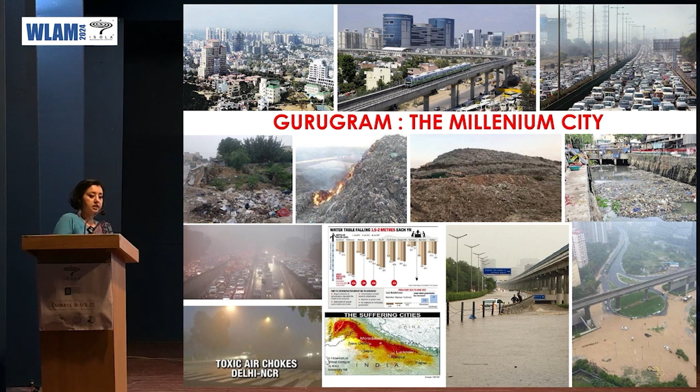The projects were typically for the government, and the land was owned by the government. Just a little bit about Gurgaon: it's called the Millennium City, but up until 2011 its population had tripled in just 10 years. Subsequently, we hear more about it in terms of Gurujam - the city gets flooded, waste is a humongous problem, it's polluted, it's flooded, and the government asks you to work from home at the drop of a hat if it rains.

The city of Gurgaon is located south of Delhi. The Aravali Hills to the southeast have all the watershed flowing from the Aravali Hills to what was the Ghata Lake, which was 340 hectares, and is now just 1 acre. The entire storm drain went through Badshahpur, all the way up to Najafgarh and then following on to Yamuna. It's a fairly flat city other than the Aravali Hills.

The section that is highlighted is actually half of that. Because of the flooding over many years, most of the natural waterways and channels have been impacted and encroached upon. This is the start of where our site was - it was actually the Badshahpur Jheel, which was a very significant water body. It no longer exists. This is in 2018.

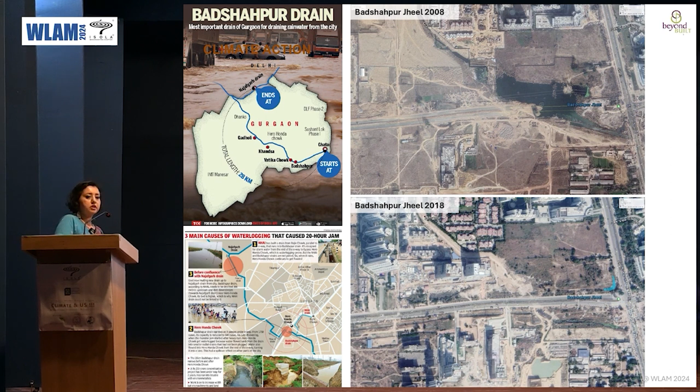There's a highway, and now it even has underpasses and the Delhi-Mumbai expressway across the top. Because of all of this, the entire site that we have, which was the Badshahpur Nehar, was converted into the Badshahpur drain - almost a 20-25 kilometer drain. The site we found ourselves on was basically a dump site, where all waste from all the surrounding developments was dumped. The photos below are adjacent to it, because the drain was also at a height.

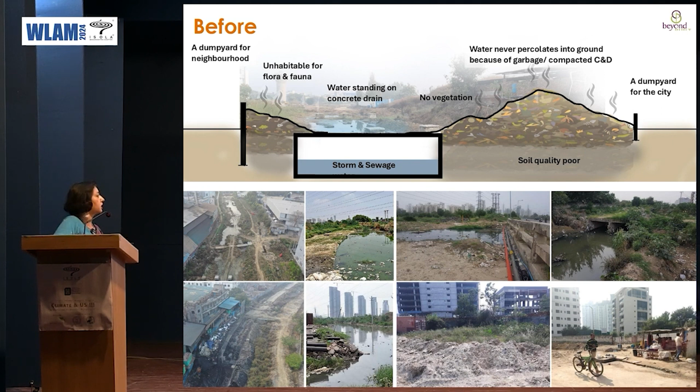Every time it rained, the neighboring developments flooded and the boats came out. So this is a situation in a typical section that we found ourselves with, where there's a storm sewer drain running all the way through the site. This varied from almost 8 meters to 15 or 20 meters, covering almost the entire length. It was a corridor site that we had.

We looked at it as landscape architects do, starting with a concept that we felt was key to everything we wanted to address - the story of Gurgaon, its people and its places, the circle of waste, because that's what we found ourselves with, and the journey of water, which is where we intended to look at the site. This site that we took on eventually started with a pilot project of 200 meters, but we developed a length of 5.5 kilometers, divided into 8 different stretches.

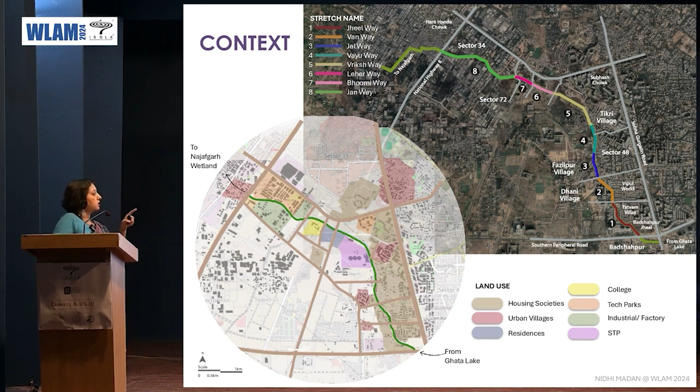Each of the stretches had a very different context around it. There were gated communities, schools, colleges, 4 urban villages, migrant labor encampments, industry, and it connected to very significant arterial roads, the National Highway 8 to the north, and to the south, the Southern Peripheral Road, which is where most of the new developments are.

That was where we started. We started small with the intention to build only on the drain, develop cycling and walking, cycling, jogging tracks. The jogging was off track, and maximize the area for plantation. That was the goal of our client, but our goal was also to capture, absorb and retain all the rainwater on the site.

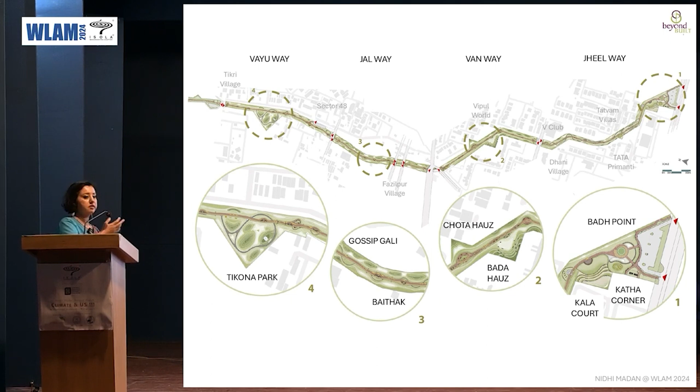Each of the spaces, just because of the context, also developed for us as a thematic space, a thematic stretch. So we started to even look in terms of how we interpret, how we talk about the site in terms of connections with nature. We call them Jheelway, Vanway, Jalway, Vayuway, and other things. We developed spaces with names and characters that were unique to each space.

We reused waste to a large extent because to start with we had so much of it, but also we found that it was very easy for us to just drive around Gurgaon and find waste, and that became something we started with. Our clients intended us to use it in the base work because they had done that in previous projects. We decided we'd put it in everything we could possibly do.

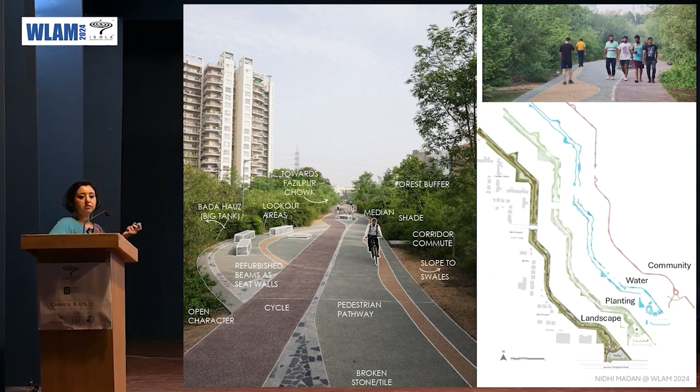So we had waste in our walls. We had waste stone in our pathways. We found concrete beams along the road, finished them up, and those became seats.

We found that when we were developing the spaces, people came out to use them in different ways. So this is the 4th corridor that we had. We developed a small little space, and we found we had a larger play area and a smaller play area, and the entire village communities would come, and almost, because it was a smaller space, all the toddlers would come and use that, and the older children would use in a different space.

We managed, because it was a drain that we were developing on, there were manholes that we had to deal with, most of which were constructed very poorly. So we had to work around them, and those became areas in the center that we call our medians. We developed 58 different unique medians, 7 play areas all across the site.

Waste was a huge part of everything we did. We used everything we found, most of it construction debris, a lot of waste even in the infill and creating. We started initially just removing all the waste, and then we found we were creating almost a landfill.

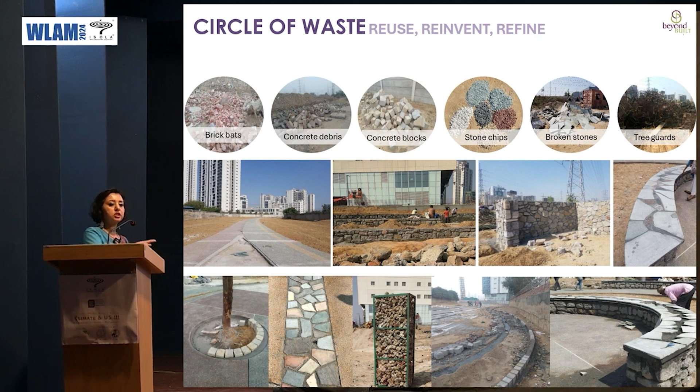And eventually all of that started to get used, because as we went further down the drain, we found the extent of waste was so enormous that if we didn't address it, and the water, because that was where also there was a lot of the sewage treatment plant, so that waste also started to add up.

Just to give you an idea of how we use the waste, every stretch had a different approach in the smallest areas of design that we did, just because that's the waste we found at that point. Also sometimes, a lot of the time, it depended on the money that was available at the time.

94% of all the material we used for construction was waste, out of which most of it was from site, from around, mixed waste, earthwork, concrete debris. The construction debris we used in many different ways, from gabion walls to actual walls to fill to larger seating depending on the size.

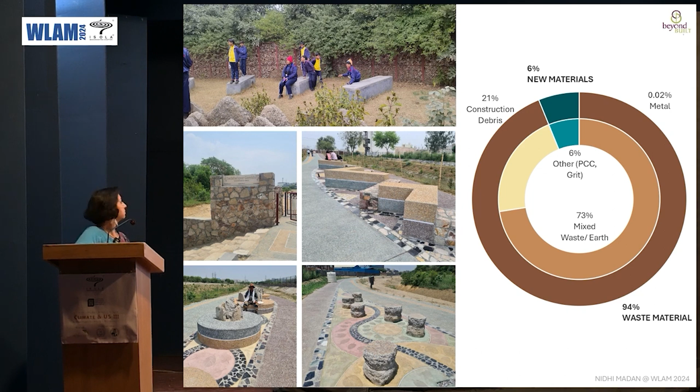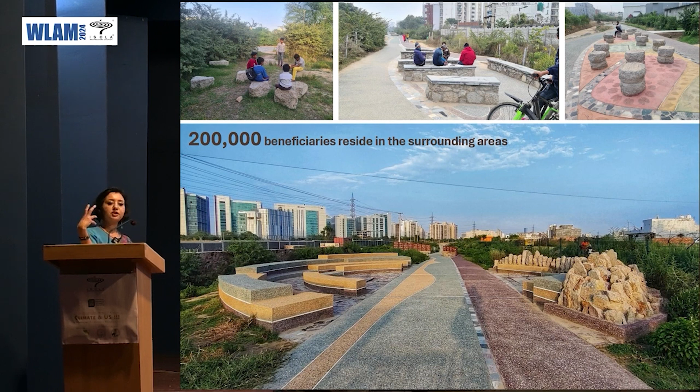The area is a very densely populated area. So initially there was a lot of concern about how much seating we were providing, but eventually it's always falling short, even right now. We also created, we started with smaller interpretation panels because so much of what we did was important to address in terms of what can be done.

There was one stretch we actually found stone walls on the side, so stone became a part of what we did, but it wasn't always - there was barely anything we used as a new material.

As part of this, another campaign that our client was running and had started was a recycle station. We developed a module of how to develop that, again using waste, where they segregate 4 types of plastic, e-waste, paper, metal and glass, and now this is becoming a prototype that is hopefully getting replicated around Gurgaon and possibly Haryana as well.

So I was talking about water earlier. So this is what we found ourselves in. Each stretch was different. Some were encroached, some were flooded, some had parking use.

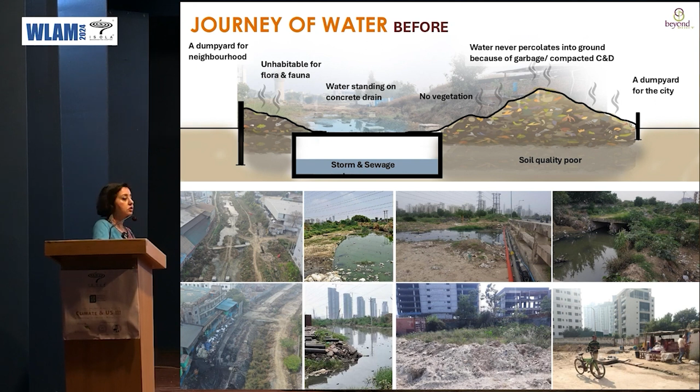What we ended up developing, and this varied depending on the stretch, is we created that movement on the drain, so that our construction was limited to areas that were already hard, and all the rest became areas of connected swales, larger water channels, water bodies, and each stretch had different thematic spaces.

We had some areas where we developed ponds, some areas where we used concrete waste pipes for rainwater recharge. We very consciously didn't look at rainwater harvesting at all, because this is a public site. It will go back to the government after a few years, and the capacity to maintain is very limited. So everything we wanted to do was very simple and intuitive, something they could both do and manage. Also, because there are 8 different stretches and two sides of a drain, each stretch had to be designed for that particular space.

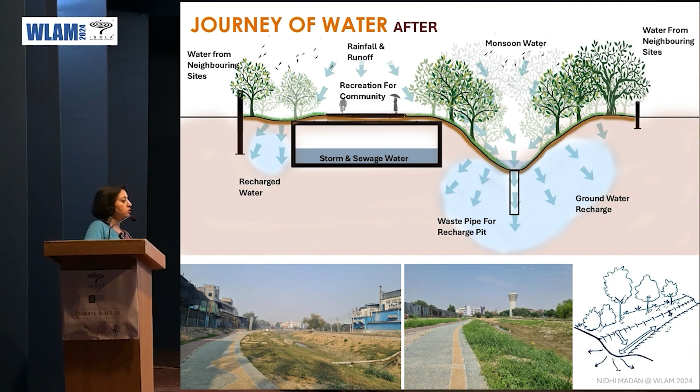Also to take care of any overflow, which was a big factor from neighboring sites. So all the materials we used also had to relate to letting it be floodable. Just to give you an idea, the drain covered anywhere from 21 to 50% of our site, depending on the stretch. So trying to navigate even planting on the drain, but maximizing all the space we had for that capacity of the ground, was a huge part of what we tried to accomplish.

We also started, because a lot of this was not easy to accomplish, since the intent was always to add concrete drains where possible. We spent a significant amount of time early on fighting to not build concrete drains, and a lot of what we did was introduce concepts: sponge sites, zero discharge sites. We will take on all the water of everything in the neighborhood. This was so early on.

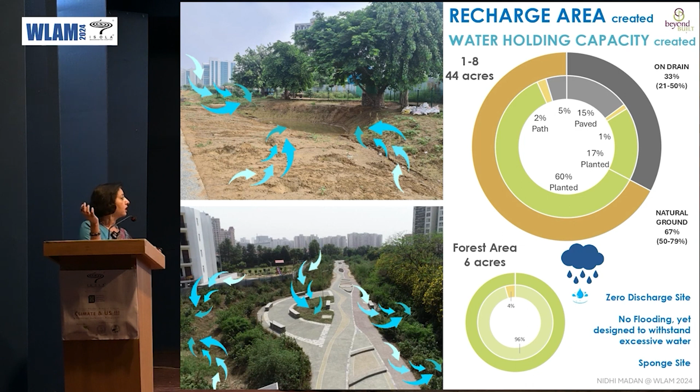This was one of our early smaller successes. This is 2019, and this is 2021 - we started construction in 2019. This is one of what we call the Bada Hauz, which was developed to collect water, and today it's completely overgrown - a large wildlife habitat. It's been closed off for the time being, but it's a huge catchment area. This was taken on a day the entire city was flooded and shut down.

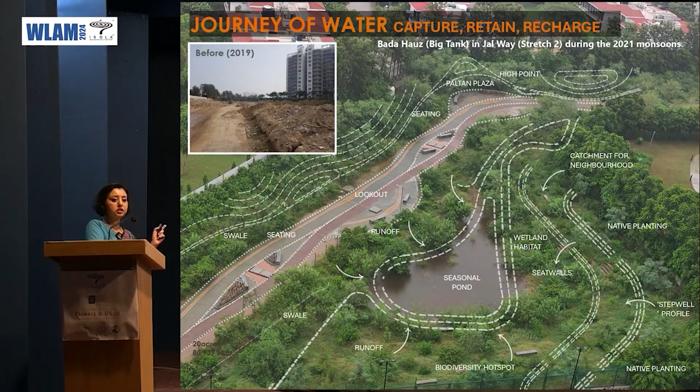This is the last stretch, closer to the highway, and it's a stretch we almost didn't manage to finish - the last 500 meters. Because if you see that building right there, there's a very important crossing on the highway, which, because of some drainage issues and how the road was designed, all the water, every time it rains, is pumped through that pump house into this area and just left on the drain. So all the area you see with water, that's the drain, and the rest is all raised, and part of it was forest land as well.

There were industries throwing toxic waste. It was just waste, and there was a lot of resistance to us being able to complete it, because they didn't want us to raise the drain. That's what we ended up doing - we raised all the malba on the drain so that we could create capacity.

We had one advantage on this site: because our clients had worked with the forest department earlier, there was an area of green that had been planted by others, and they said if we wanted to plant or develop it, they would let us. So a large part of that we had the advantage of taking on as part of our site. But right after this, there was a huge large area where we said we will take the entire water of that city and manage it - you will not have to put a single drop in this drain.

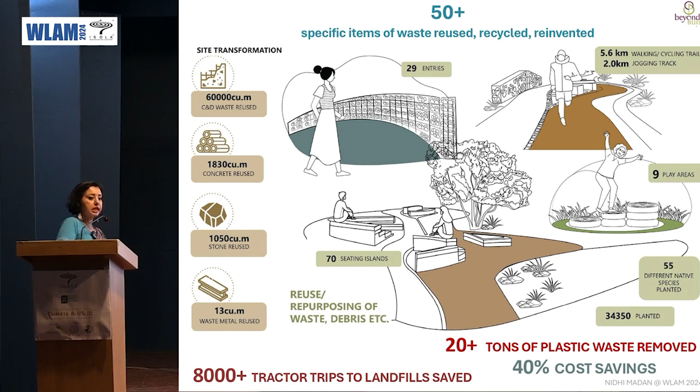The quantum of waste we ended up using was 60,000 cubic meters, 70 seating islands, 29 entries, 5.6 kilometers of walking and cycling trails, 2 kilometers of jogging track, play areas, and 55 different native species. So far 34,000 trees - at the last stretch alone, over 20 tons of plastic waste was removed, and we ended up saving a lot of money too.

We found this was a very good way to showcase what we could do, and it also helped us - this project was actually a collaboration, not just us. We had our clients initially be very suspicious of some of the things we were trying to do because their mandate was not so much.

Today, a lot of what we did is their mandate. A lot of the people we fought with in government to convince them are now our strongest allies. So it has actually been a process where, from ground up, we've been able to look at other projects as well and impact how they approach certain projects.

We also had the opportunity to work in Gurgaon around the same time. If you look along the streets, all the green belts in Gurgaon are typically given to corporates to develop, and each becomes an individual sort of 'my little green patch.' We always found that the border between Delhi and Gurgaon really has no distinction - you don't know when you've arrived in a state, or arrived in a city that's a millennium city.

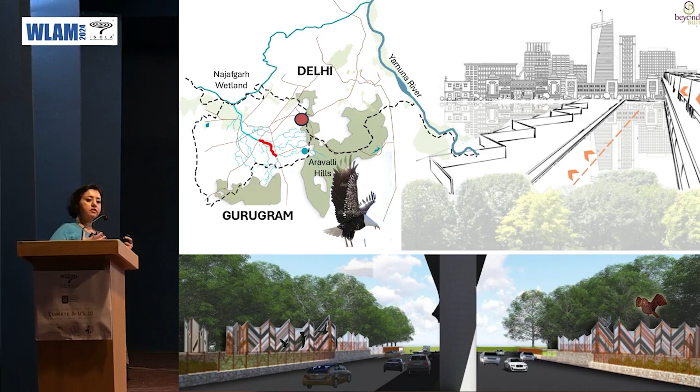The area we found ourselves in, a corporate had got a space just for plantation, and we said let's make something more of it. Since we were doing work with waste and water, with an idea of what we wanted the government to represent as a statement of who they are, we said let's use these areas along the road with access. There's a Aravalli Biodiversity Park across, marble markets and illegal construction on one side, and really the highway that you see. So we looked at it as an arrival, but also a departure - a statement of what it can be.

We wanted to represent the idea of the contradictions of what Gurgaon is. So our concept started with the unfolding story of Gurgaon - its towers, its disparity, its history, its modernity. We worked with the sculptor Gopal Namjoshi, who also works with waste. It was also important that our client here, Make My Trip, who gave us the space to do this, had also been part of the journey of the Aravalli Biodiversity Park to represent the Aravallis, and that became what we ended up working with.

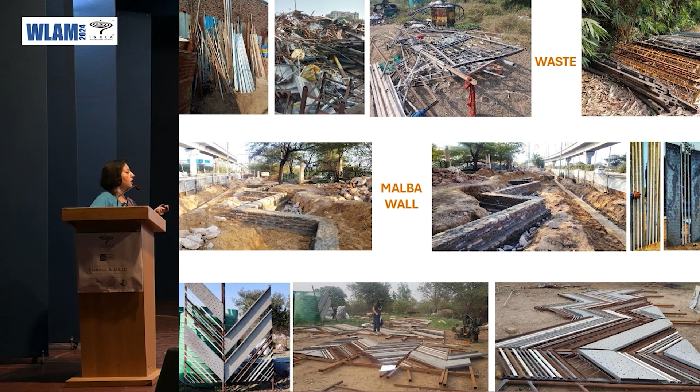We worked with waste to create a sense of these panels from all the kinds of metal waste we used. Here we decided design was where we're going to translate that space, again with our concrete debris walls. Most of this project happened during COVID.

Here again, even though we were intending to do native plantation, we didn't want it to be a forest. We wanted identification with very specific plants, so that familiarity with how you look at grasses, not just something that grows along the road, but as part of the design, how you look at color and texture in a space. Today we have Gurugram ki Udan, at the border, which has a native eagle owl sculpture designed by Gopal Namjoshi, inspired by the native eagle owl, and then we created the panels and the setting for that.

Another project we did side by side, because we had been fighting about water so much. We were writing reports for every single thing that we felt needed to be done or needed to be saved. We worked on a Nala restoration at an area that again had been flooded. This for us was more of an experiment. It didn't work completely. We ended up stopping the flooding along the road, but because it was part of a larger network where there were so many sewage connections being made almost daily, the larger interventions we were trying to achieve, and also with limitations of space and ability, we were not able to do.

But at the same time, in 2020 there were flash floods that flooded a very significant part of the Golf Course Road, which is almost parallel to the Aravallis, but it's also where all the new, very expensive developments are, and they all got flooded. So as a result, the answer then seemed to be, okay, let's build a concrete dam around the Aravallis to hold the water back.

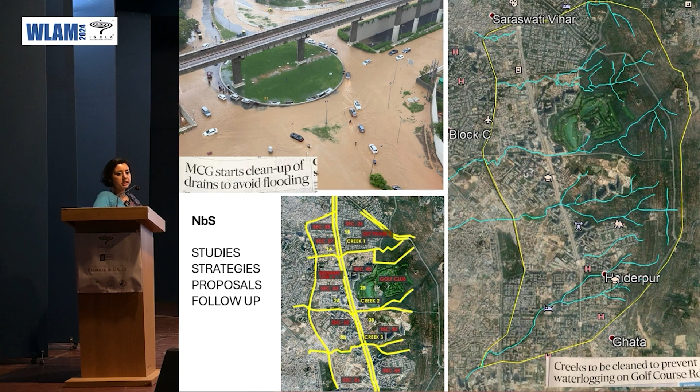I think in 2019, a lot of the suggestions at that time, we did studies, we strategized, we put together proposals, and we were very encouraged because the CEO of GMDA at that point said, okay, let's try this, because they've tried everything else. I think time was also limited. But this was the next year, the government as well took on a number of projects where they cleaned creeks, they cleaned water bodies, and lots of other things.

There were other projects that came out of this and are continuing to come out of it. The Sikanderpur Pond, which was under development, that Kavita Jain is now working on, became a huge resource to drain water. Currently they're working on restoring the creeks. Another project that's been taken up, that was part of the suggestions at that time, was the Badshahpur Baoli, which is a beautiful, probably one of the 5 historic water structures in Gurgaon, now basically a waste dump. If you see the image on top, you can't see it, because they were planning at some point to build a road over it. But that's another project that's now taking shape as a result of some of this.

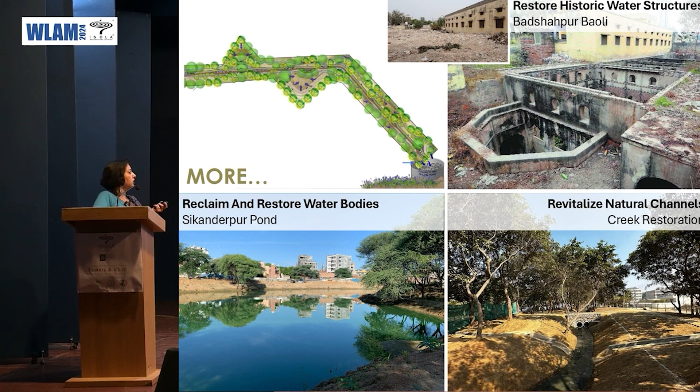Since we've been engaged in a lot of these projects, we've been getting more and more ambitious about how much of this engagement we can do and how far we can take it.

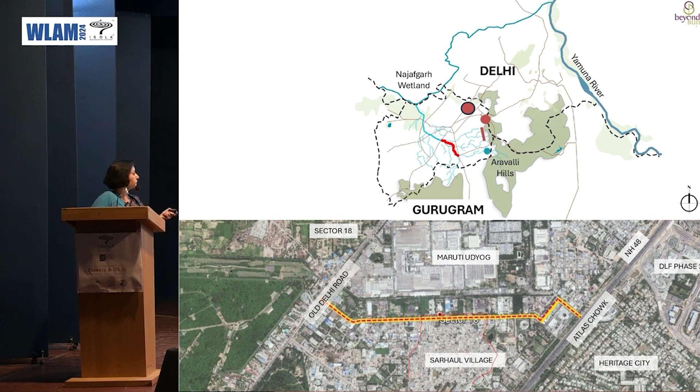So another project that we had started was a project which was called Anath Road. We started it at the same time. Anath Road is significant - it's just a 2.5 kilometer road stretch which connects the highway to Old Delhi Road. As you can see, Maruti was a huge tenant. Again, this has a very diverse land use. There's the large Sarhaul village, there are very large corporate houses, there's industry, single family housing, again encroachments and other things. This road has been very challenged.

It's a 10-meter carriageway, but it had almost 1,000 trees on that stretch, planted over many years, and 370 large mature canopy trees. Before we had come onto this project, there was an intention, because it was waterlogged every year, to cut the trees, widen it, and make it a 6-lane highway.

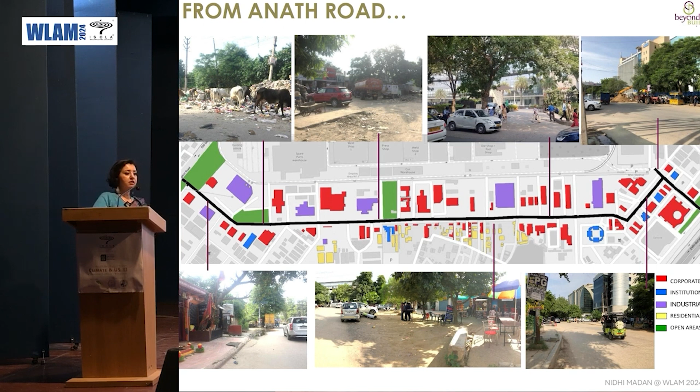So WRI fought it for a year and a half, and we came and fought again for another, basically tried to convince people for another 2 years. And then finally the project took on some shape. This for us has been more challenging because we were trying to apply a lot of what we said on a much more integrated project.

This project also had so many different agencies involved. In Badshahpur, we were a little bit buffered by direct involvement other than from water, drainage, access. But here, every single agency in the city was there. There were services constantly being put in place.

We've been very encouraged because of our experience with Badshahpur. We've been able, with a different NGO, to have that dialogue with different agencies in the government, hold their hands, also in what we feel are details they should do, strategies they should use for native plantation, for waste reuse, how you manage sites, how you manage accessibility. This site has almost 20,000 people walking a day, and this was 5 years ago.

20,000 people and 33,000 cyclists. That was the impetus for us getting on this project. It's still a work in progress, but for us it's been very encouraging that even though it's been very contentious, it has brought every single stakeholder on board, including the users, because it's a functioning street. It also made us a part of what we feel we can play a role, which may not necessarily only be design, but a lot of it is letting people know what can be done and what our role can be in all of this.

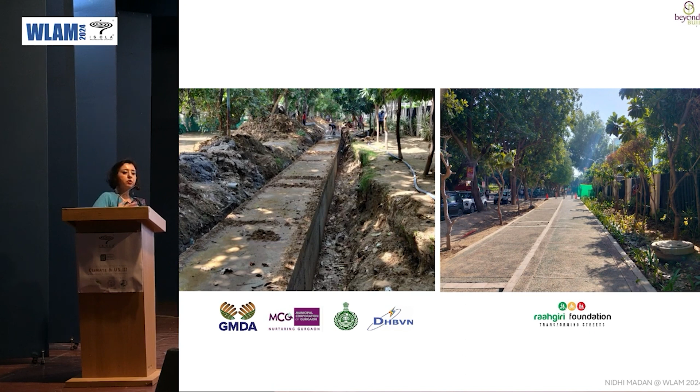So all of these projects for us have been, to a large extent, proof of concept. Before we started, we could say whatever we like, but people said, you don't know the reality, how to make it better. We have now started efforts on capacity building, also on informing people what is it that they get out of this, because that's ultimately what you're looking for.

There are a number of tangible benefits we all know. You have open space, you develop corridors, you have walking, cycling, but so much of the other things that we struggle to articulate in terms of quantification are values that once you show a space and you experience a space and you see the transformation, they start to have a life of its own. So we've gone, in fact, even from very contentious relationships with people in the government to them understanding and owning this, which for us has been our greatest success.

Also, because there are so many volunteers who participate in planting, there are so many staff, there are so many workers that have used the site and sponsors, the exposure has slowly built up.

We started with challenges of working with waste where we could not find people to work with waste, especially with metal. In Badshahpur we went through 30 welders who came, took money, ran away, and our clients told us, leave it, don't do this stuff. And we kept saying, no, we want to show it because that's part of what it is. And then we finally found people.